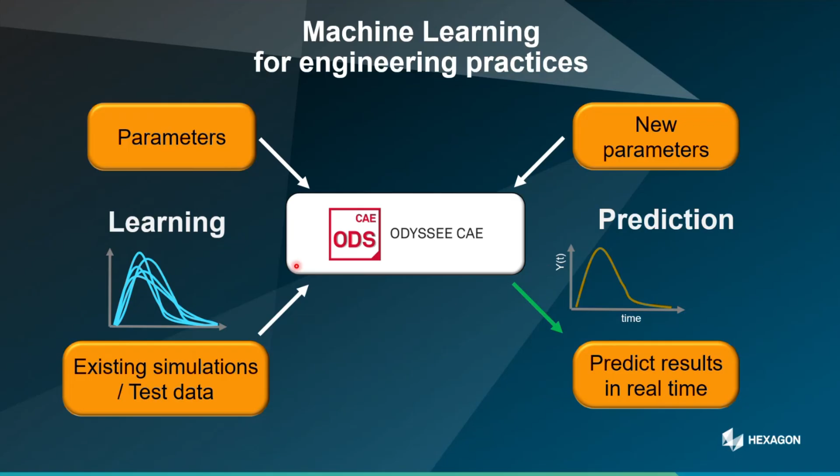And also, like we just mentioned, ODYSSEE itself is a mathematical solution. It will not run the finite element solver, it will not solve the physical equations, which means we will save a lot of time. Normally, per run, ODYSSEE CAE will take a second or maximum a few minutes. In this way we can generate new simulation results, but still based on the relation we already have from previous simulations.

This AI part is not the focus for today, but just in case you have interest: AI is more focused on imaging or CAD model, the geometry. If we use imaging or CAD as input, what AI can create is a customized AI application that will predict the outcome - the response and the field data.

I think I also have some examples at the end, but the main scenario you can use this for is, for example, defect testing - to see, no matter what the manufacturing process is, if you have the image, you can predict if the part will fail or not, depending on the imaging. That's really a way the manufacturing industry uses it, to see what the influence will be and to detect the defect in an early phase.

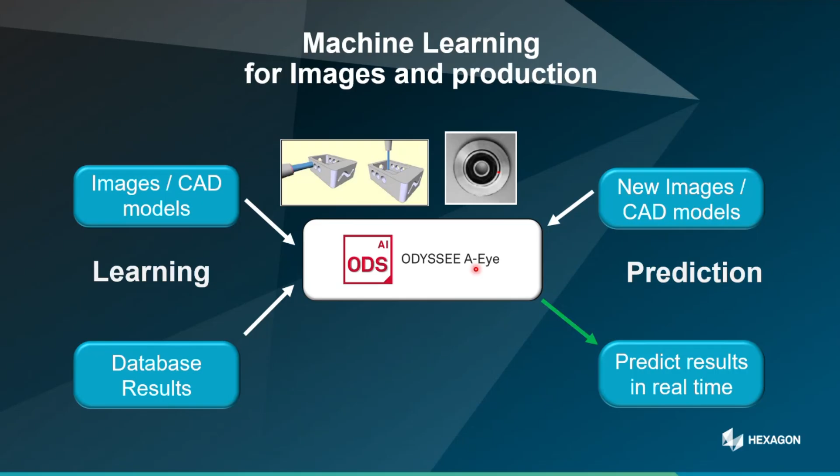And of course, as design engineer, you may also have the CAD model, and you may want to know what will be the influence of different geometry, maybe the size of the block or the different fastener location or injection point. So that's something ODYSSEE A-Eye will do. This is more for imaging, to predict the result.

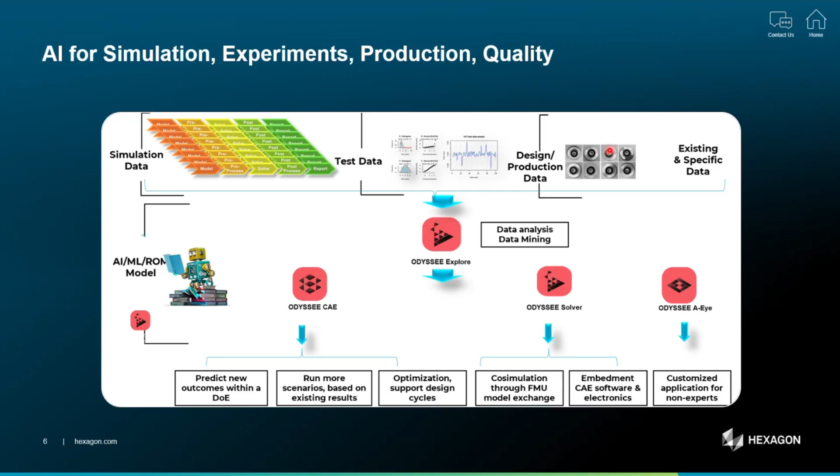So to summarize what we already discussed, the input for Odyssey can be simulation data, can be testing data, and also can be imaging. Additionally, we can also read sensors. So if digital twins is a hot topic and you want real-time simulation or real-time detection, that is possible by using Odyssey because it really solves the issue in a short time.

Before we go for the case study to show more detail, I'd like to explain a little bit more about the reduced order model. We call it ROM here. Basically it's 3 steps. I'll talk a little about this concept, but it's not mandatory for the user of Odyssey to fully understand or study this. We have different algorithms, and you can choose to optimize the algorithm, but it's not necessary because Odyssey has a very simple workflow. It's not really mandatory that you master these different algorithms. The reason I show you this is just to give you an idea of what is behind Odyssey when it runs.

So this ROM is a way to calculate based on a mathematical approach. This reduces the computational complexity, and it's used for example in CFD, structural, or thermal simulation. This is a very common method if you talk about finite element AI solutions. The concept is that in finite elements we have high dimensional calculations, and the calculation time, if we need to run CFD or thermal, will be very high and very long. So what we do is decompose the calculation dimensionally and simplify it using this mathematical approach.

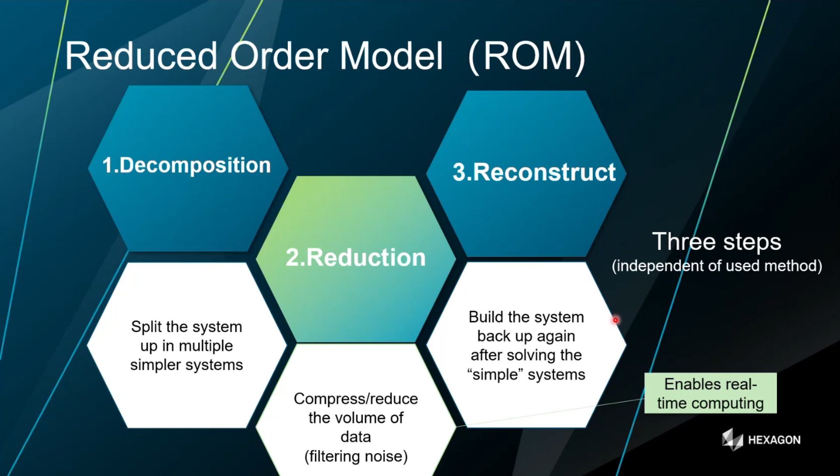The reconstruction is to recover what was in the first step, the complex original system. We assemble again the simulation, the simplified model result from before. Then we use the previously extracted basis functions or models to go back with this low dimensional result and project it back into the high dimensional space. This gives you a fast solution but reduces the computational time very efficiently. That's why we can really save time, going from finite element simulation into the mathematical way.

So here is a simple way of showing how we do this reconstruction. You see we should have a complex reaction between input and output, but how can we disassemble and decompose it into different features, extract the feature, extract the model per reaction, and then do the reassembly. Those three steps are just an example here, to give a simpler overview.

If the previous explanation is still a bit complex, here's a simpler example: imagine we play different instruments and the frequency will be different. At a certain second, we actually hear the combined reaction from all three of them. But if we disassemble them, each reaction is simplified, and if we calculate per instrument, the reaction, the calculation time is low and simple, and the reaction is more consistent. So after we disassemble and go back, we can have a simple reaction.

Then when we give a new input, maybe a new time frame or new frequency, we can easily see what will be the assembled result. So until here we finish the core concept about Odyssey, how it runs in the background, and what mathematical algorithm we use, and why we can save time.

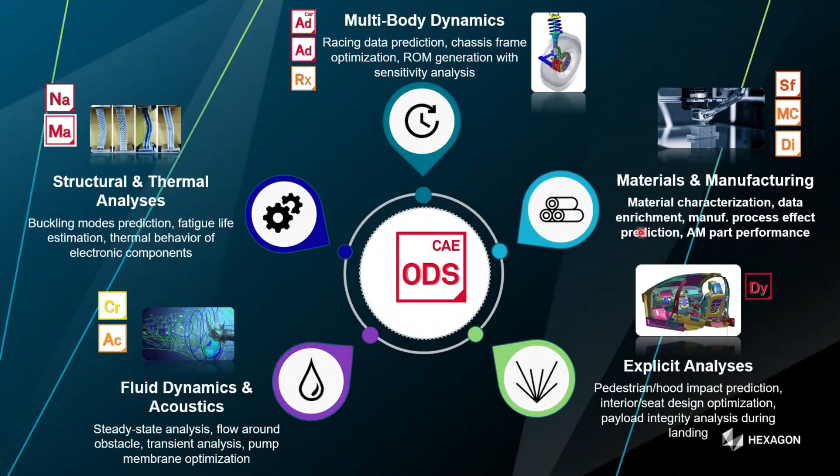So Odyssey can combine with all different solvers. What I want to say is that no matter what solver you use, as mentioned at the beginning, it's not really taking the physical performance, it only reads the data set. This means no matter if you use Marc for thermal simulation, Nastran for linear simulation, or Actran for acoustic simulation, for Odyssey it's the same.

They can work with all these different solvers because you have the CSV file, the input, all the elements and nodes, and they will read as an input file. So no difference. On top of that, Odyssey is not only limited to Hexagon solutions. If you have other solvers, Odyssey can also do the coupling simulation and the analysis.

The traditional FEM workflow that everyone is already familiar with - I know you are all experts here. Normally we do the CAD modeling, generate the CAD file, the geometry file, and then we discretize it to generate the elements and nodes to have element points for the numerical calculation. Then we may have boundary conditions and loads. This is the traditional way we use the finite element solver to solve the physical equation.

But now what we do, as mentioned in CAE, is instead of solving this physical equation - especially for repetitive calculations, for multi-load case analysis - we use the ROM we mentioned on the previous page. We only need several high quality simulation results, then we train the model and use this mathematical solution in order to not mesh the geometry again and not run the physical simulation to predict the new scenario.

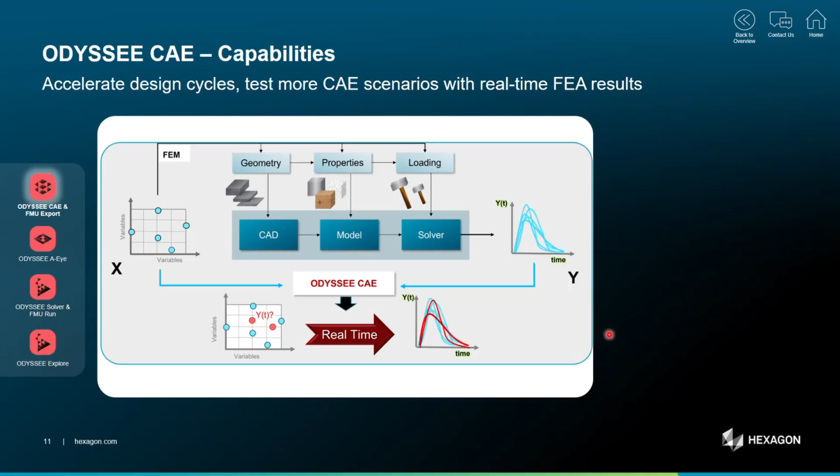The workflow here in Odyssey - the input can be simulation files, testing data, or data from sensors - all is possible as long as it's data. What we do is separate the data we have into two different sets: one set for training, and the other data set for validation. For the training part, we normally suggest leaving maybe 70% of your simulation data set, and leave 2 or 3 for validation.

When we have this data set, we fit it into Odyssey, and Odyssey will learn from the input and output files. To be clear, the data set is not only the input file, it's actually a finished simulation file, the whole simulation including the result. So Odyssey CAE will train itself and learn the simulation path.

After they finish the learning, it's very quick, and you can give the new input. The new input can be XN, which is the same here, but the output will be the simulation output - what is predicted by ODYSSEE CAE. And what you can do here is bring back the validation point to compare.

On one hand, you have the prediction result from the Odyssey AI solution. On the other hand, you have the simulation data which you already ran. Then you can combine them to see if the result is matched, if it's accurate enough.

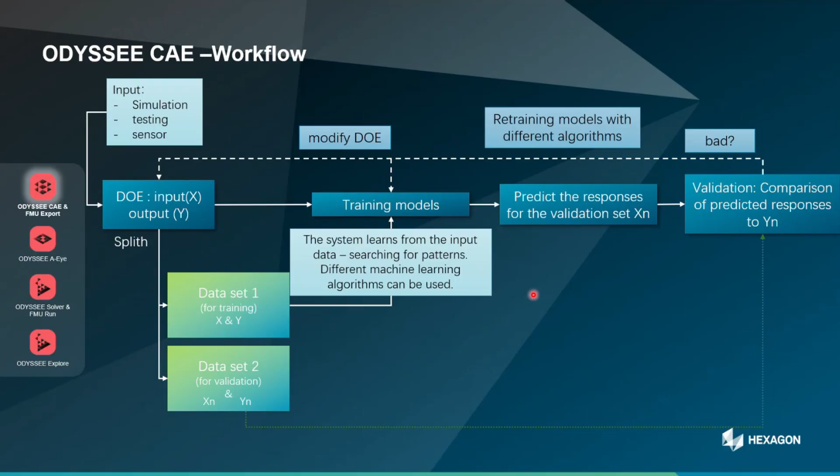And if it's not accurate enough, maybe we need to add more DOE - maybe the DOE set is not right, maybe the boundary condition is not correct - or we need to choose another algorithm because with more data, a bigger data set, we need to use the RAM. So those are things we can modify: either fill in more data or change the algorithm, then we retrain the model. So that's the general workflow we have for the CAE.

Before I go to each step, I will show you the outcome that we normally have. So in the previous section is the curve that we can have, but we can also generate the animation. So you just see here.

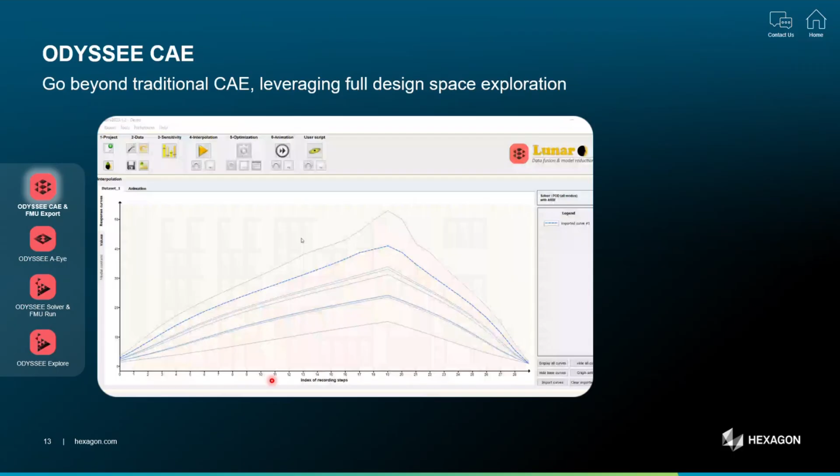So that means when you run the simulation, although we say we will not run through the finite element behind on the background, we will run the mathematic way. You may generate, for example, 10 different results, and choose the optimized way, and you can generate the animation to see in which step, in which second, like the history of per step of the simulation.

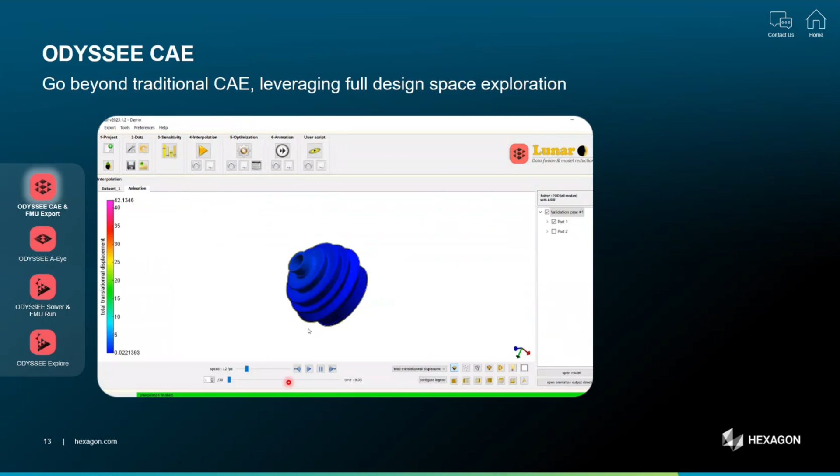So that is repeatable and comparable with the finite element process. You can imagine the output can be like what you see here, the animation, and also the picture. That is very useful if you do, for example, drop testing, which costs a really long time. Or if you have static structure simulation or thermal simulation that needs a color map, or for example car crash testing. So per step reaction, per location, per element will be very important for you as outcome to review.

Okay, so I have just one more page before we go for the detail, the capability of the CAE for each step. So just to repeat myself.

So we say that we have ODYSSEE that is purely data driven, and on the other hand, when we run finite element, we have this partial differential equation that we try to solve. This is more for the physical finite element one. And here is the limitation that I talked about at the beginning.

So as we are purely AI based, purely mathematic based, we will solve the issue based on the data that we have, not the physical data we have. And if you really want to, that's why we do the interpolation. If you want to simulate outside the boundary, above the temperature you implemented or above the frequency that you simulated, then we need to combine with a little bit of the physical.

So there are also solutions like physical informed AI, or called hybrid model, where you can embed the partial differential equation into the AI solution. So there are solutions there, but it's not today's topic.

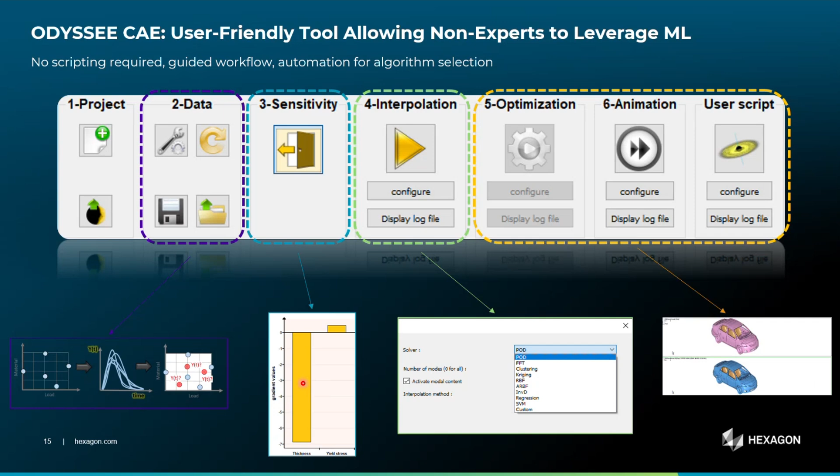So from here I will give you a really physical view, the real view of what the interface of ODYSSEE will look like. Before I play the video, I need to be honest that I recorded this video in a short time and recorded it by Teams, so the quality is not so good. But I will try to explain because the number is not that important to see.

So this is the first step where you have the data. I know it's not that clear.

So after you create a new project, you can import the data. So now what I have is 20 different inputs. So this input X, you can have thickness or yield stress.

What I want to show here is that you can choose either to consider thickness or consider both of them. So you can also deselect one of the data sets, either from the input parameter itself, so the whole yield stress will be deselected, or you may see the similarity between dataset 2 or 3, then you remove one of them. So that is very flexible for you.

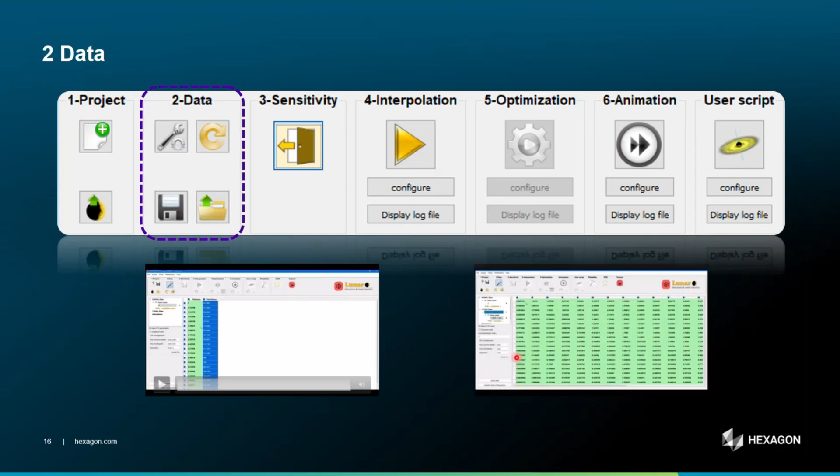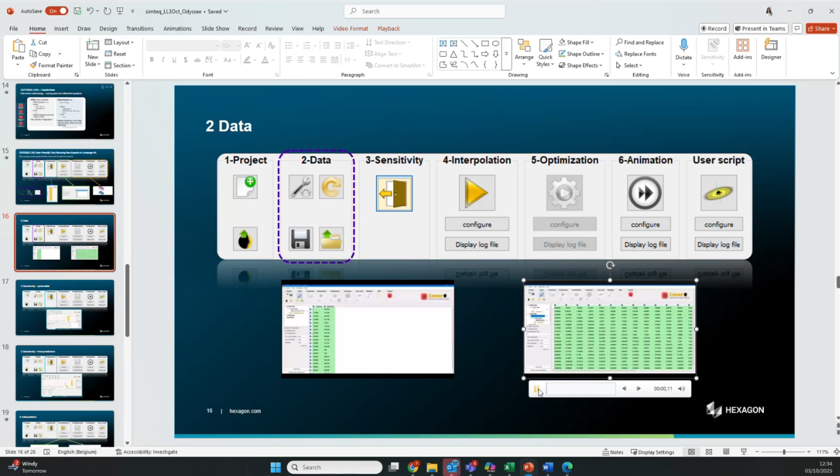And on the other hand, sorry, give me 1 second. Why can't I play the other? Okay, sorry, I should pause.

Okay, so then on the other hand, you will have the output. So this is also the simulation result. So you see that in total we have 20 cases, so 20 points. So in the previous case we have 20 inputs, 2 parameters, thickness and yield stress, and here we have 20 corresponding results.

And what I try to show here is that we have 20 of the outputs. We can select all of them as the train model, but we can also save maybe 1 or 2 for validation. But what you notice here is that you can't choose one test case from the output, because that only can be changed from the X value, from the input value of your element, because that is linked with each other.

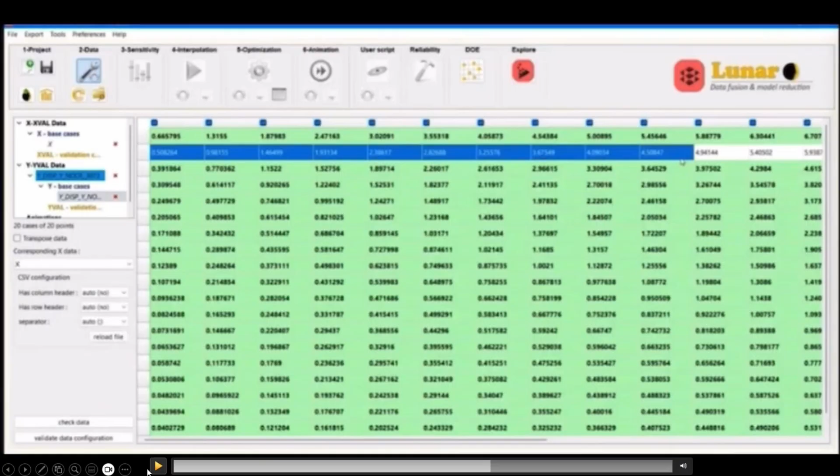So if I go back here, if I remove section 2, then automatically in the train model the output value will not be included. So this is more useful for the validation part. You can leave 1 or 2 sets for validation. Or let's say that if you want to clean the data, you already realize that 2 data sets are already duplicated, or the data is already out of physical meaning, then you can deselect the data. So there are all possibilities that you can have.

And then we go for the next step, which will be the sensitivity study. Let me see. So this is also a good part of ODYSSEE, that you can pre-study your data. So parameter study, let's say kind of a partial parameter study that you can study.

So what we see is that you can see the parameter effect in this sensitivity step, that we can see the response curve in ODYSSEE CAE. So what we can do is the sensitivity study, and this step allows you to know the influence of the parameter at each step, or each time interval influence. So this is very good.

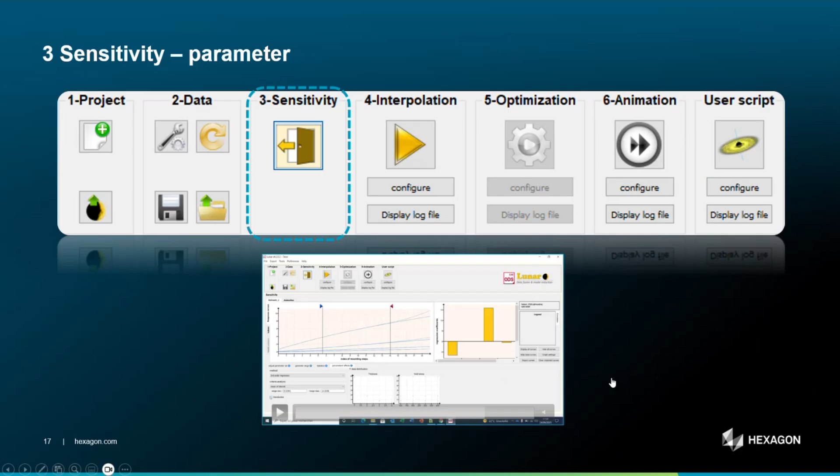I know I may be too slow for the video, so I will go a little bit quicker on that.

So here in this video, what I try to show is we can do the first prediction. Let me see... I hope, yeah. So just to emphasize one more time: you see that I have the thickness controlled between 1 and 4, and I have the yield stress controlled between 100 and 400. The reason is that this is the boundary condition that we have as input file.

So I need to emphasize here again, because what we're doing is interpolation. In order to have high accuracy, we suggest you predict in the range that you give as input. So if you have the thickness between 1 and 4, and you say you want to predict the scenario for 10, then that's out of the physical domain and also out of the mathematical algorithm range that we can simulate. We can still do it, of course, but the accuracy will be low. So you need to pay back for the accuracy. That's why we have this range suggestion, that within the input range we can do the prediction.

So if I continue the video - let's say before that we talk about how we clean the data to make sure the input file is accurate enough and in the right range. And once you check the parameter effect, we can change to this parameter set, adjust the parameter set, where you see I give a new input - the thickness and the new yield stress. So these 2 points are not from the simulation you already done; actually it's the new input that I want to simulate.

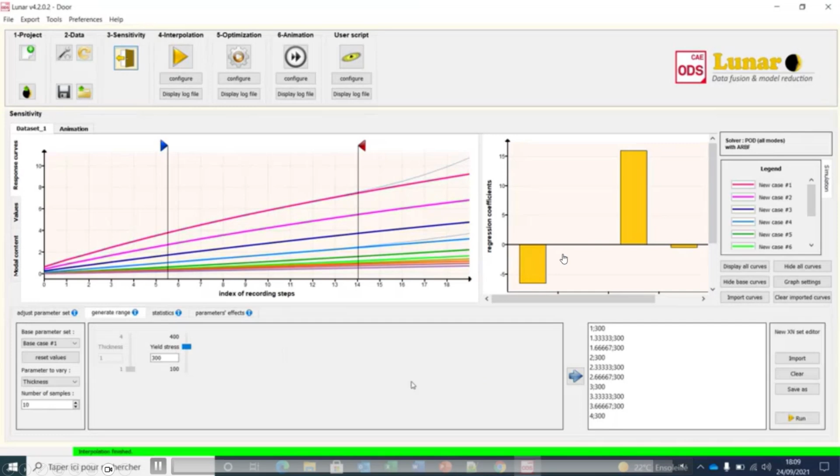So that's what we can have. Of course you have more options if you want to focus on one simulation scenario, or if you want to hide some of the curves. And here's also the point that if you want to bring back the validation dataset, you can also do a comparison here.

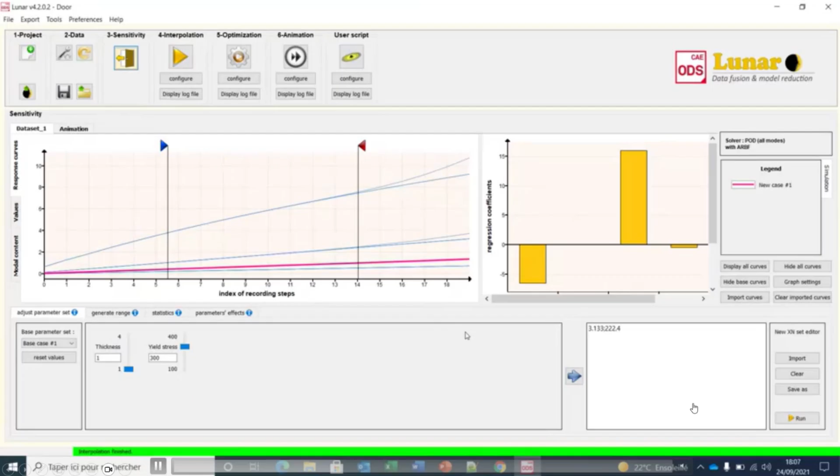There are also more options I didn't cover in this video. For example, we also have the DOE design, the DOE generator. So if you don't have enough data - for example, you finished one or two simulations - we also have the DOE generator that can generate more cases. We also work together with Nastran, so we have some workflows there. If you're a Nastran user and interested, please contact us and we can show you more video workflows.

I'm sorry I'm a little slow, so I'll speed up a bit. Here we talk about the mathematics solution, the solver we choose, and the interpolation solution that we have.

For now, you don't really need to see the difference here. We have a lot of different solvers that you can use for interpolation methods directly - for example, ARBF. This is really a good one that works for both curve data prediction and also for imaging, and it's good for generating animation.

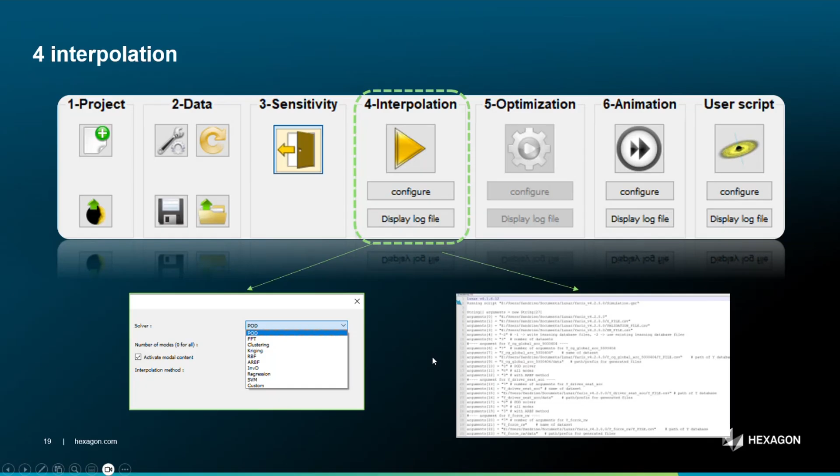The solver really depends on your input, the size of your database, and what output you're looking for. Different solvers will give you different response times, and the CPU resources needed will also be different. You can contact us and we'll give you suggestions based on your use case.

Okay, I think it's interesting to show you here that we also have this reduced model algorithm to create real-time animation. Normally what you saw before in the sensitivity study was the curve showing how the response changes with different datasets. But of course, we can generate the animation so you can compare with your validation case.

So what we have here is a real-time animation of a finite element simulation for a new parameter set - what we gave as new input. When the animation is finished for the first time in the project, a learning algorithm will also be implemented.

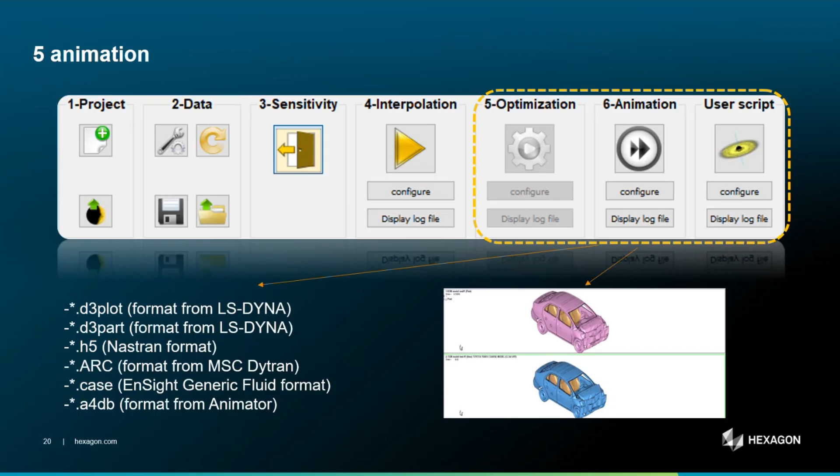For this animation prediction, as I mentioned with the solvers on the previous page, not all solvers are suitable for generating animation. But if you choose a solver that's suitable for both animation and curve prediction, you don't need to repeat the step here - there's no learning phase to be trained or run, you can automatically select the animation to export.

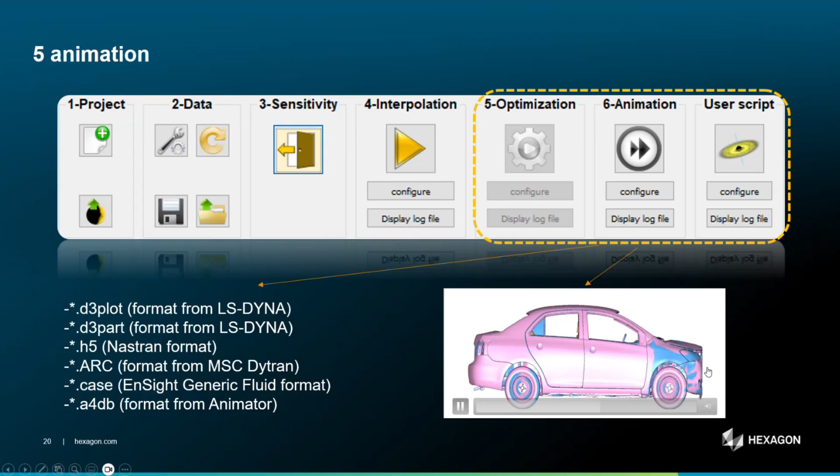That will further save your time. I know there are more options, but we are limited on time, so I put some examples here. We only show limited case studies, but if you have more that you're thinking about, where you have your finite element simulation done, please contact us. We can help you see the use case and implement the solution. I'll quickly go through these three examples. It's very simple to understand, I think.

The first one is acoustic simulation combined with ODYSSEE, used to build a ROM to predict the transmission loss in the motorcycle exhaust system. You see the geometry is the muffler and also the catalytic converter. That can be optimized without running the simulation in Actran itself, which can help you improve efficiency and check the performance in a short time.

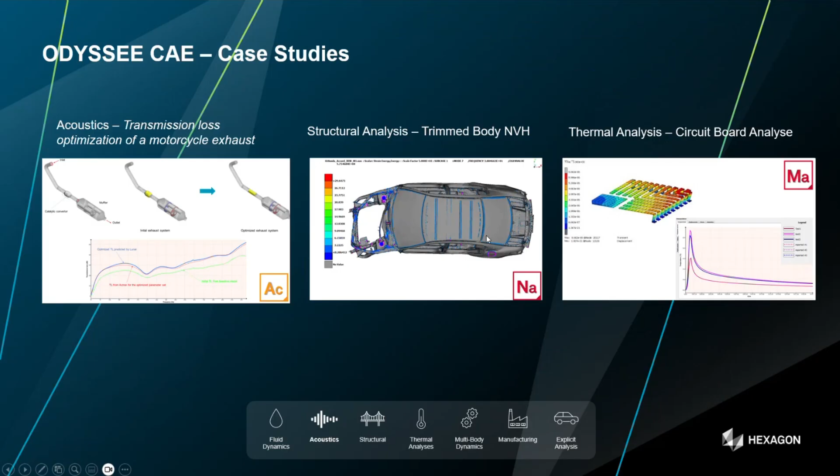So that's all I'll show you until here. I hope you have a basic feeling about ODYSSEE, and I'll quickly show you what imaging can do, what we can do.

This is a separate module from ODYSSEE - this is a new one we call AI. This is more for CAD-based or image-based learning models, and it's still a very easy application that we can create based on some picture database. So what we do is either your input is measurement, imaging, or let's say a 3D step file - that can be the input data, the resource that we have.

You see here we have examples from automotive, from tires, different designs, and we link that with the acoustic result. What we do is give all the different pictures here, and we also fit in the output file. What the user needs to do is just give a new picture, a new tire design, and ODYSSEE will give you the output of the acoustic simulation.

So in AI we have some embedded solutions here - all already developed. It's like small applications inside ODYSSEE AI which you can use for automotive, aerospace, healthcare. But of course you can also use another type where you build your own customized solution.

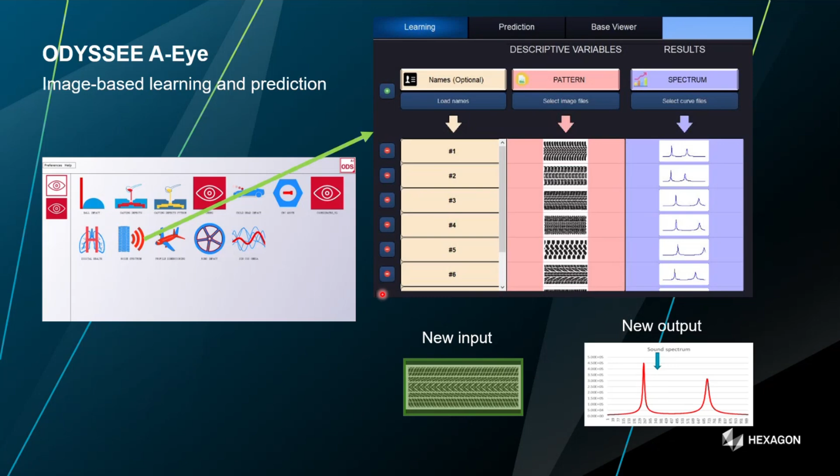For imaging process solutions, in case you have a different scenario - for example, if you're a factory producing lots of parts, maybe this case is from casting, you have 2D imaging to check if the quality of the cast part is good enough. Then we can identify where the defect is, whether the component is qualified or not. So you don't really need to do a 3D drawing - it's only image processing to extract the picture.

So you see the picture that they take from the product itself, and compare it with the one you gave as input for the training model, the reference model, the reference imaging, to do a prediction. So in this case we have about 100 images, and then we can do the AI inspection to automatically inspect the new product to see if it's qualified or not.

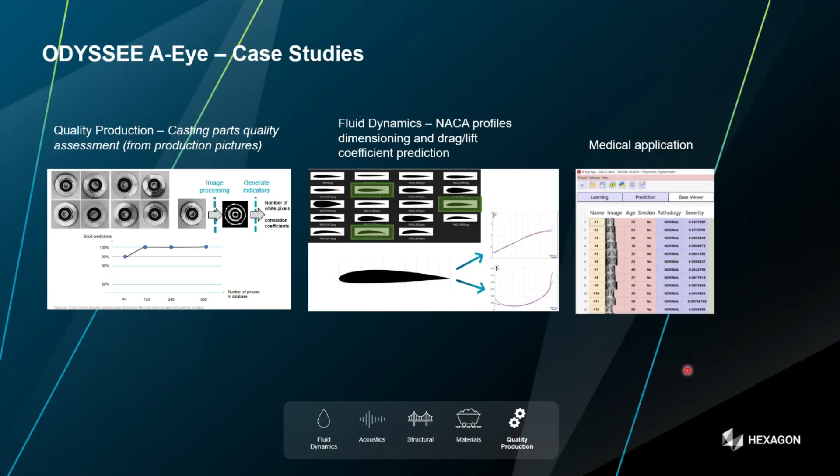So I will not really go into Nexus Enrich too much because we already ran out of time, I see. So just one - sorry, it's not working.

My computer is frozen. Okay, sorry, my PowerPoint closed. I need to reopen it. So yeah, just to - I'm not sure. Yeah, I'm still in the meeting.

That's good, so just one last comment. So we also have this Nexus Enrich - it's another AI solution from Hexagon that generates material data based on your current simulation, based on your current data set. This is on the cloud, and you can generate new composite material data at different temperatures, different time testing scenarios, different fiber orientations, or different fiber percentages. This is also combined with the algorithm we have, but this one, as I mentioned, also introduces the physical equations behind it, so it's a bit of an extrapolation.